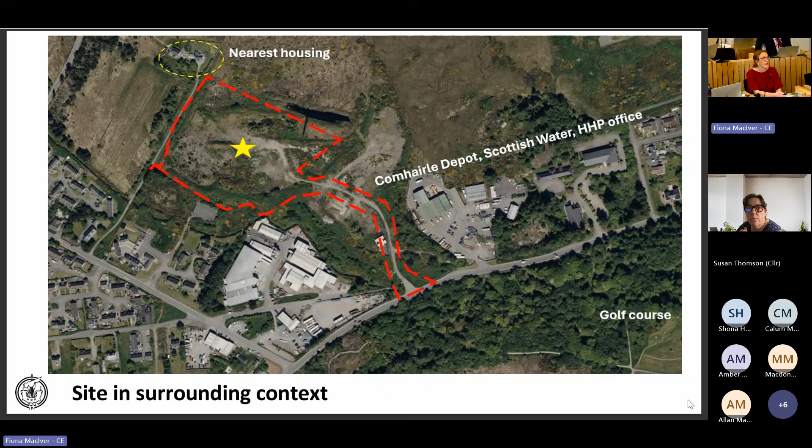For a wee bit more context, you can see the golf course just to the south of the road and the castle grounds. On the east, on the right-hand side of your screen, you can see the Comhairle depot, the Scottish Water depot and offices, and the HHP offices, in case that gives you a wee bit more of an understanding of the location. The nearest housing to the site is indicated in the wee yellow circle at the top there. And then to the south of the site, you can see the Marybank industrial area and more housing surrounding there at Althebroich, Memorial View and Eilean.

The proposal, again, workers for residential accommodation, it's presented in 4 two-storey blocks for a maximum of 200 residents with associated amenity facilities in the form of a separate gymnasium, a 2-storey canteen and leisure building and a facilities management office. There's also proposals to have an on-site generator and water tank storage, and it's within the main settlement of Stornoway. The application site extends to approximately 2.8 hectares.

The site is currently disused and was previously a builder's yard. As seen on the maps, the surrounding uses are generally industrial, residential, with some agricultural uses also. And again, the policies of the Lewis Castle grounds are to the southeast, opposite the entrance to the site from the A859.

The site is not within any areas designated for habitats or landscape value. And again, a major development within the hierarchy and was subject to the pre-application consultation process, which is a formal public consultation process held in advance of the application being submitted.

That pre-application process involved 2 public meetings and was advertised and promoted through local press and online. There was also online feedback options for those who could not attend meetings. The comments, responsive changes to the proposals and any additions that were considered from the public engagement process have been consolidated and submitted in the form of a pre-application consultation report which accompanies this planning application.

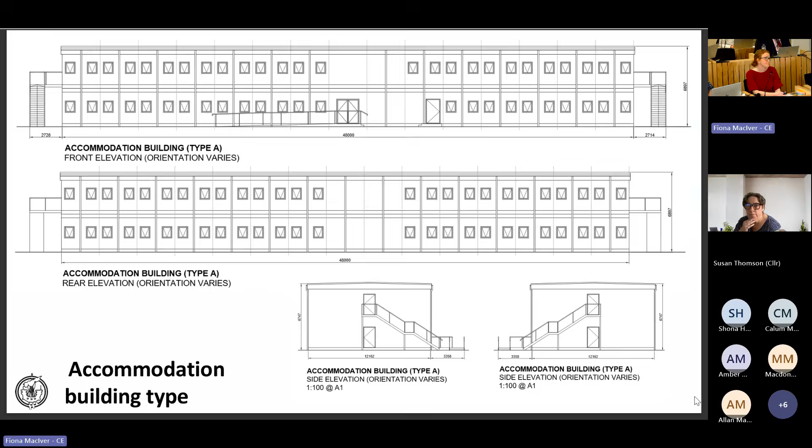To show you the type of unit proposed, they are prefabricated units, 2-storey in height in a dark green colour with a maximum height of 6.9 metres. They are proposed on a temporary period, a 5-year duration that is being sought for the units being sited on the site. And an indication of the smaller ancillary buildings, approximately 3.6 metres at the highest point.

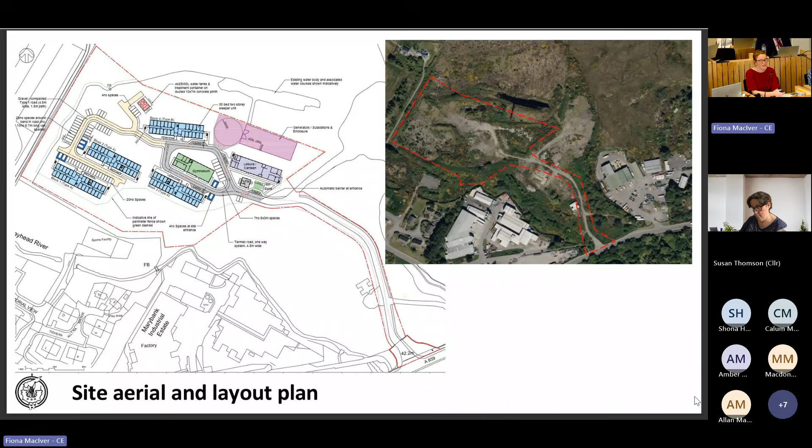Councillor George Murray: Thank you, Chair. What's the capacity of the development, and will it be running at full capacity? Thank you.

Thank you, Chair. Thank you for that question, Councillor Murray. The maximum capacity is 200 persons. They believe there will be a small period of max capacity midway through the 5-year consent, but it's likely to be running closer to about 120 to 150, based on the information submitted within their design and access statement. Thank you.

Councillor Susan Thomson, online: Thank you, Chair. Thanks for the report. My only question was about the concerns raised by residents about antisocial behaviour and safety. Are these blocks going to be mixed gender, or predominantly single male occupation?

Thank you, Chair. Thank you for the question, Councillor Thomson. This isn't something we've specifically queried with the developer. It's not particularly a planning issue, though I appreciate why you'd want to consider it in relation to potential antisocial behaviour. We did consult Police Scotland on the development, but unfortunately didn't receive a direct response. It's important to note that when considering applications, we have to assess what the inherent likelihood of antisocial behaviour is, such that it would become a material planning consideration. If the development is occupied and operated as proposed, there shouldn't be antisocial behaviour that would be overwhelming and thus a material planning consideration. Any criminality would obviously have to be dealt with directly by the police. I'd note the developer indicated they would have wardens on site to address potential issues, and that they wanted to engage with the community. Again, not something we can direct through the planning process, but useful to note in your considerations.

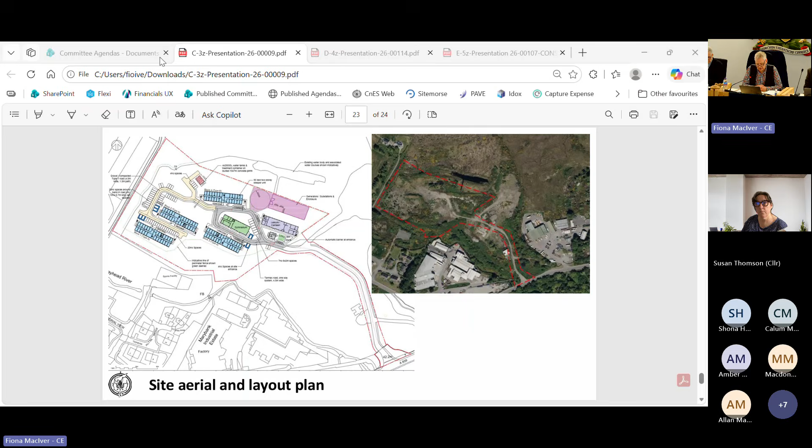Number 2: erect 8 semi-detached houses and associated access road, footpath, service connections and surface water drainage at Upper Barvas, Isle of Lewis. The planning application has received more than 6 representations and, in accordance with the scheme of delegation, cannot be determined under delegation, and is therefore referred to the board as a decision.

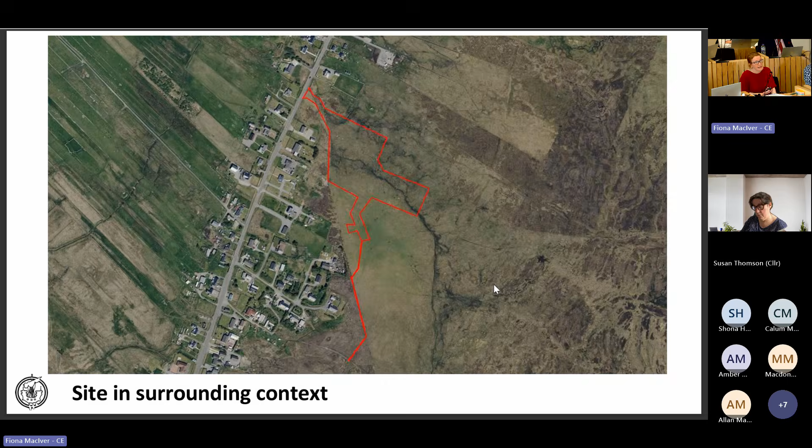This is an 8-house development with associated infrastructure within the rural settlement of Upper Barvas. The site extends to approximately 1.59 hectares and includes the off-road pathway to the south. The proposed access route does not have a public footpath, hence the addition of an off-road path to take people to the existing pavement.

The site is currently used for grazing but is not classed as prime agricultural land. The surroundings are other parcels of agricultural land, and residential and agricultural uses. While the site is not within any designated areas for habitat or landscape value, it sits near the Lewis Peatlands SPA and the Ness and Barvas SPA, designated for protected bird species. The proposal is a local development in terms of the planning hierarchy.

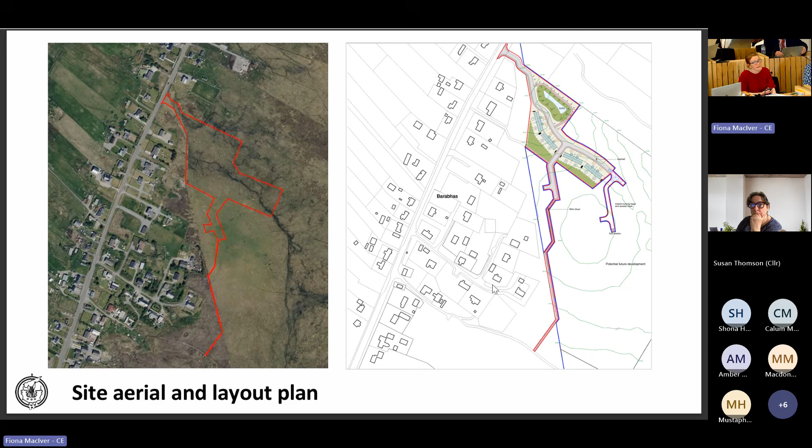I'll take you back to an aerial view side by side with the proposed layout. It's quite a simple development in terms of physical works. You can see the access road coming in at the north point, the surface water drainage proposals to the north of that access, and the 8 houses in four blocks just to the south. The dark green areas are proposed dense thicket planting for screening with adjacent properties.

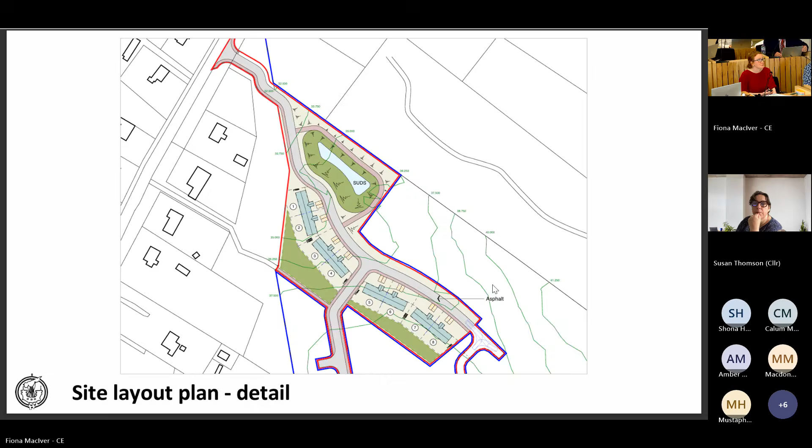We'll zoom in so you can see it a bit better. The majority of the pattern of Barvas is quite linear; however, this area does have a long-established backland development to the south. The proposed houses are all of the same design, 3-bedroom properties, arranged in 4 blocks with 8 properties in total.

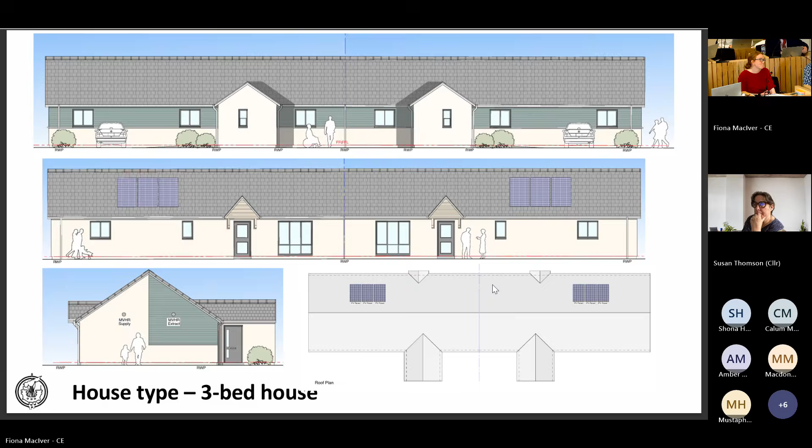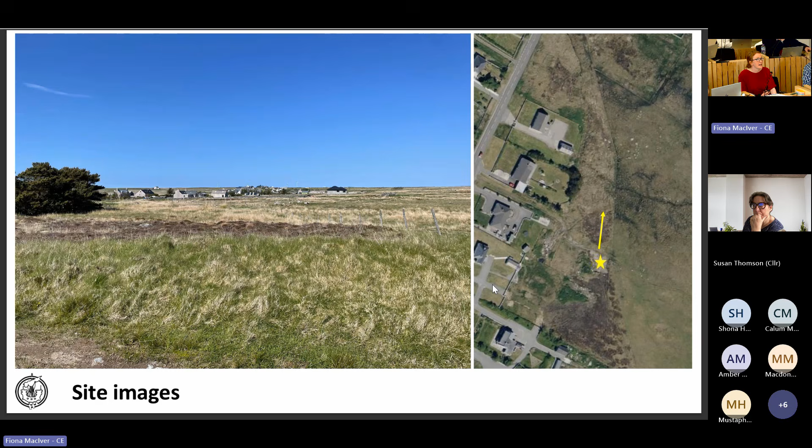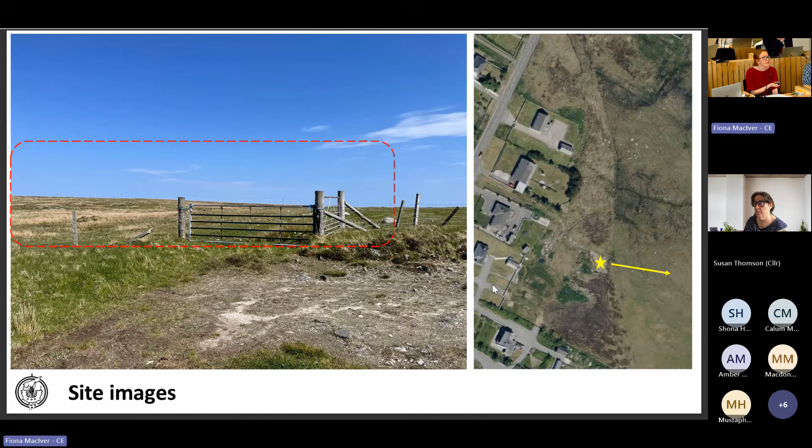Just take you around again. That fence line coming into view now is where the footpath is proposed to route towards Lower Barvas. Again, on the satellite image, with some of the planting, you can see the backland housing development that already exists, which would be close in line with the proposed housing.

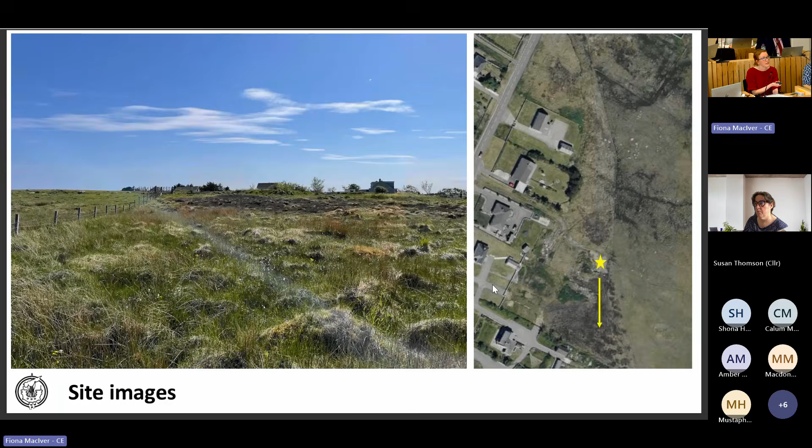So the key planning issues that were raised and considered through policy, representation, and consultee responses were the principle of the development at this location, the potential impact on the character of the settlement and the precedent the proposals might set, residential amenity impacts, road and pedestrian safety, infrastructure impacts including those on health and schools provision, and also impacts on wildlife and habitat.

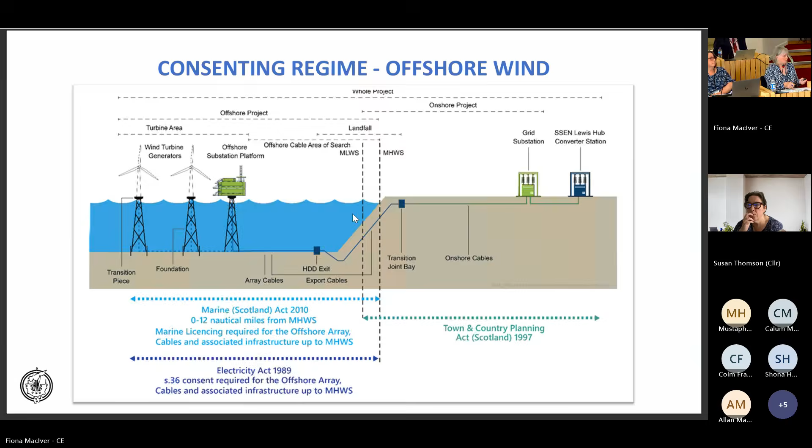The Comhairle is only one of a number of consultation bodies in respect of the consents subject of the report. Scottish ministers will also have consulted other consultees, including Nature Scot, SEPA, Historic Environment Scotland. We understand local community councils and a number of other relevant authorities and stakeholders will provide input to ministers on different aspects of the development.

Marine Directorate do not apprise the Comhairle of the response of other consultation bodies, nor of the detail of representations made by the public. The Scottish ministers will take the response of the Comhairle into account alongside all other relevant matters, including contributions by others when making their decision.

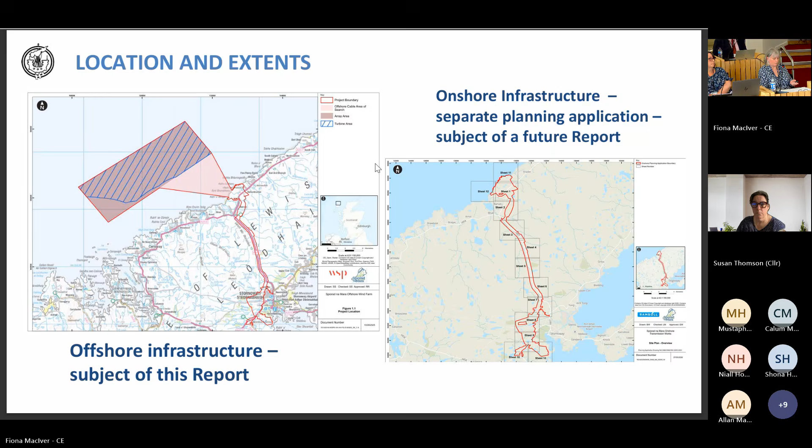The EIA is required to assess the realistic worst case scenario. In other words, in compiling an EIA, a developer is required to consider the extremes - the largest footprint, the tallest structure, the worst case interaction of the effects. In this case, the proposal is to construct a fixed bottom offshore wind farm, meaning the foundations will be grouted into the seabed. So it's not a floating system, although it's at sea. The potential expected capacity is around 900 megawatts.

The developer is considering two different design options. The 44 turbine option has turbines with a maximum blade tip height of 338 meters above mean sea level. The second alternative is 60 turbines, and under that option the blade tip height would be 293 meters above sea level.

They have also considered two different options for the substation. One scenario is that the substation platform would be at sea, and the second scenario is that the landfall substation would be on land on a site identified on the coast at Barvas. Ultimately, the connection would be into the grid near Stornoway, where the HVDC, the SSEN HVDC hub, is proposed.

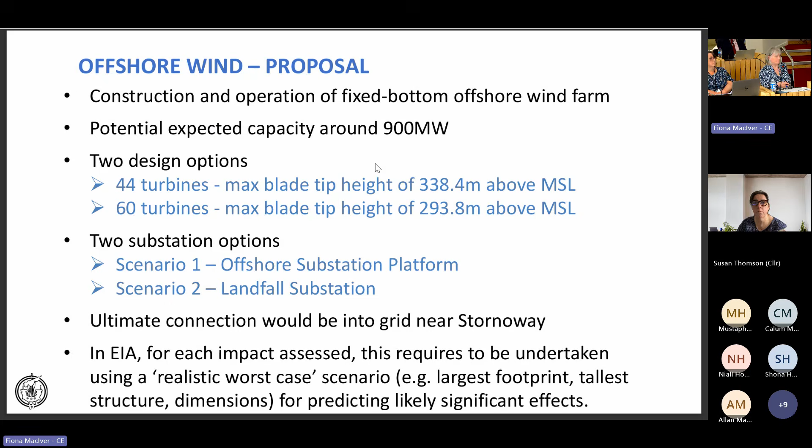In terms of the substation options, this slide illustrates the scenario of the offshore substation. With an offshore substation, there would be a multi-leg jacket foundation with a transition piece, and the substation would sit on top of that at sea. It would be accessed and serviced from the sea.

Then what would happen is the cables would come ashore. They would be drilled through horizontal directional drilling through the rock below ground level and come into a transition joint bay at Barvas. There would be no substation ashore, and the cables would come across the moor towards Stornoway.

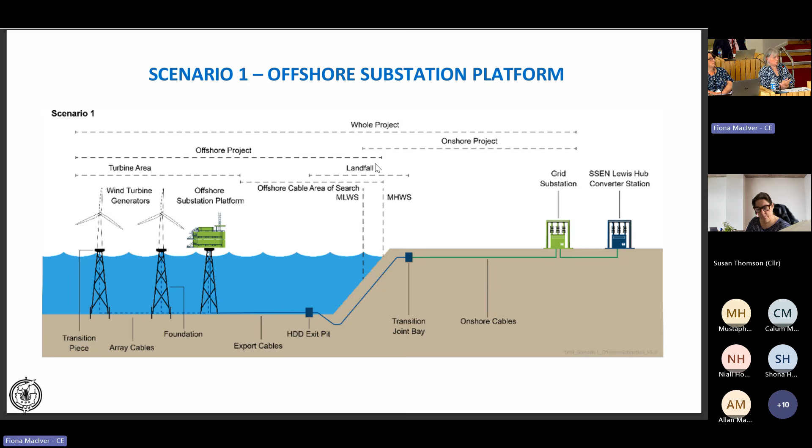Under the second scenario, there would be no substation at sea. Again, the cables would be drilled below ground, coming into a transition joint bay ashore. There would then be a landfall substation at Barvas, and then the cabling coming across the moor towards the substation at Stornoway.

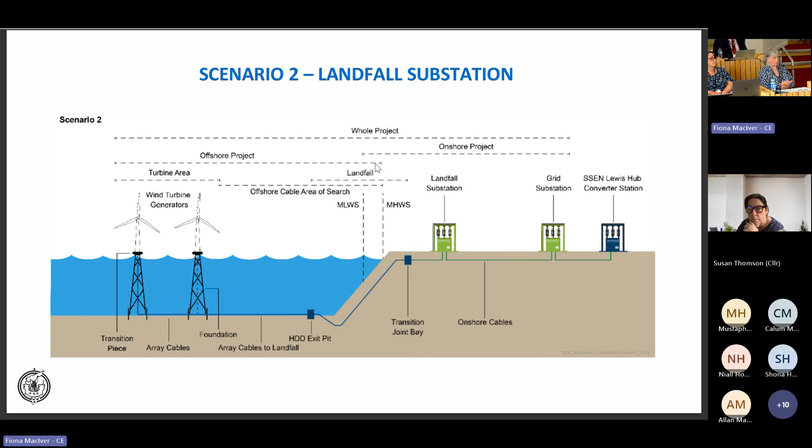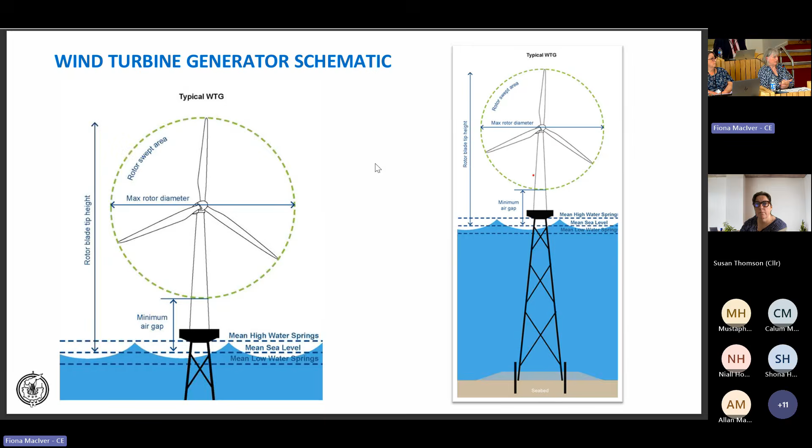Just to understand the actual detail of the turbine generators and how they would appear. On the right hand side is the full height of the structure needed to support the wind turbine, with a multi-leg jacket foundation, either pile driven or grouted into the seabed. The jacket, being in the marine environment, will be treated and painted, typically yellow. The transition piece and the top of the foundation will be visible above the water limit, with more visible at low tide than high tide, before the actual turbine tower, hub and rotor. On the left hand side, a typical wind turbine generator would have a maximum rotor diameter, hub sitting on top of a tower, bolted onto the transition piece on the foundation.

The onshore and offshore works would both be programmed across a 5-year period, and these would be going on simultaneously. It's important to note that percussive piling, which we'll discuss later in the presentation, would be restricted to 5 hours of any day.

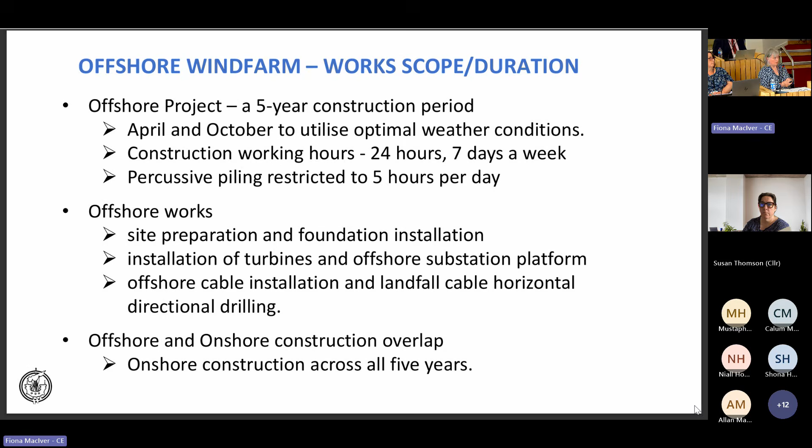The area hatched in blue is the area where all turbines would be contained. The layout was adjusted in order to remove any turbines from the part of the site in the south, in order to increase the distance between the turbines and the boundary of the South Lewis Harris North Uist National Scenic Area.

The turbines around the perimeter of the site and a limited number of others identified in red are turbines that would require aviation lighting, lit at night for aviation safety. The offshore substation, if that scenario were to be adopted, is identified in yellow on each of the layouts. The pink wedge coming in towards Barvas is the area for the cables coming ashore.

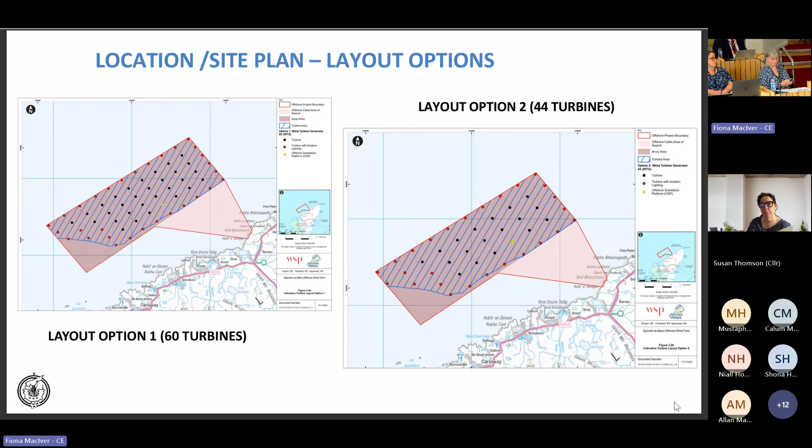The next number of slides will briefly take you through our consideration of the matters that inform this recommendation before the board. The detail is set out in the report which has been circulated to all members and made public on the Comhairle website.

The first issue considered is the principle of development of a wind farm in this location. The site itself, option N4, was identified in the Scottish Government's sectoral marine plan. The developer contends that, along with some other policy matters, this establishes the principle of development of the wind farm in this location. We don't share that view. Further, we don't accept that the scheme is necessary to achieve the climate change targets set out for ScotWind, and that inclusion in the sectoral marine plan does not establish an overriding need for this particular project.

Based on the topics we'll cover in the next few slides, it's our view that the location is not acceptable due to the particular impacts on the local authority area, despite recognising the importance of maximising renewable energy generation. Our view is that it should not be at any cost.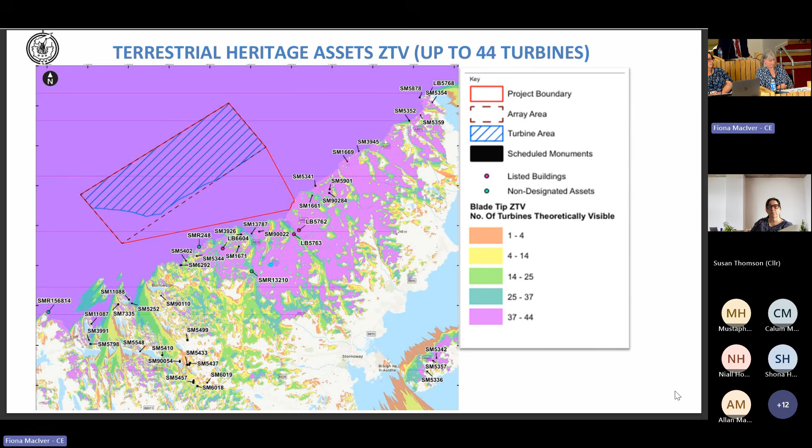The other topics that were looked at were airborne noise. There is a proposal that in order to install the foundation pieces, there would be a requirement for percussive piling - that's like piles that are driven with a hammer.

Noise does travel over water. We have experience of that in the past through other developments. Having examined this part of the EIA, there's concerns over the assessment methodology and clarity of the findings, worst case scenario, questions as to whether that has been robustly addressed, and uncertainty remaining about what the piling noise might translate into and the resultant human health impacts of that noise.

Again, our view is that it doesn't demonstrate policy compliance, and there's concern that the mitigation measures that have been proposed are not clearly defined, and there is uncertainty over whether they could be secured and effectively implemented, such as would be necessary to protect human health.

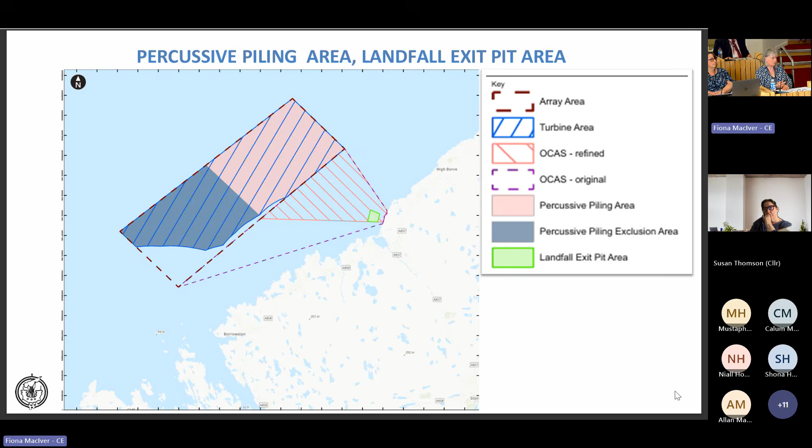The EIA also includes a socio-economic impact assessment, which sets out the potential benefits of the development from a socio-economic point of view. There is also a separate chapter on commercial fisheries, which again have socio-economic benefits to the Outer Hebrides area, and there is also a section on tourism.

These sections of the EIA were examined by colleagues in economic development, and again, while the potential socioeconomic benefits are acknowledged, there are concerns.

What has been identified is the methodology for assessing them is inconsistent, and particularly in relation to tourism, the data used is outdated and the impacts potentially underestimated. There are also concerns that the mitigation measures proposed are not specific, and concerns over how they could be secured, meaning that local socioeconomic benefits may not materialise.

Again, commercial fisheries has been looked at, and concerns again relate to displacement, loss of grounds, mitigation, and policy conflict, with concerns over whether the impacts that are likely to arise could be adequately mitigated.